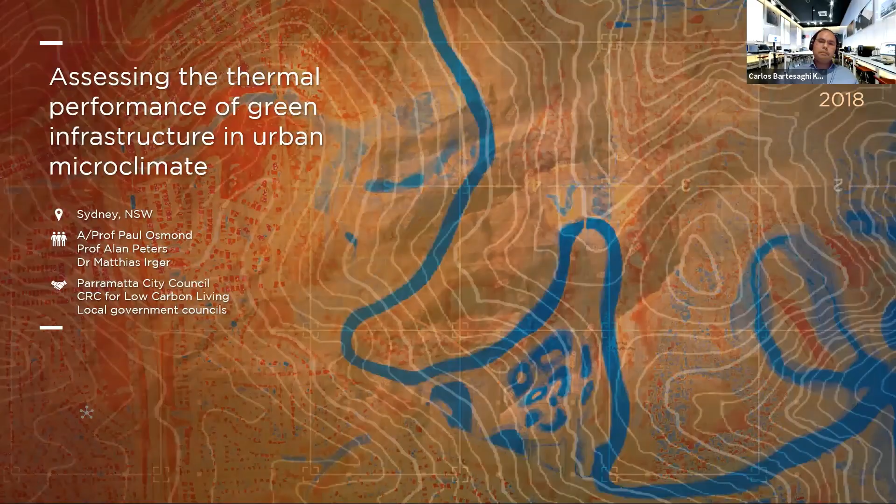So what is the problem of overheating in Sydney? Well, the spatial pattern of climate in Sydney is very obvious. We have eastern suburbs that are commonly much cooler than the western suburbs, and particularly Penrith, which is usually up to 10 degrees warmer during summer compared to the cooler eastern suburbs. So the patterns of urban overheating are not the traditional patterns we know, and particularly Parramatta, which is in between, has a completely different pattern. Parramatta is here, with completely different patterns, because it's exactly at the breaking point where the sea breezes stop and we have another synoptic condition coming from the desert, hot desert and westerly winds blowing. So we have these two forces fighting with each other.

So I was thinking I will concentrate on trying to understand the value of green infrastructure, in this case green open spaces, trees and water, in reducing urban overheating across Sydney.

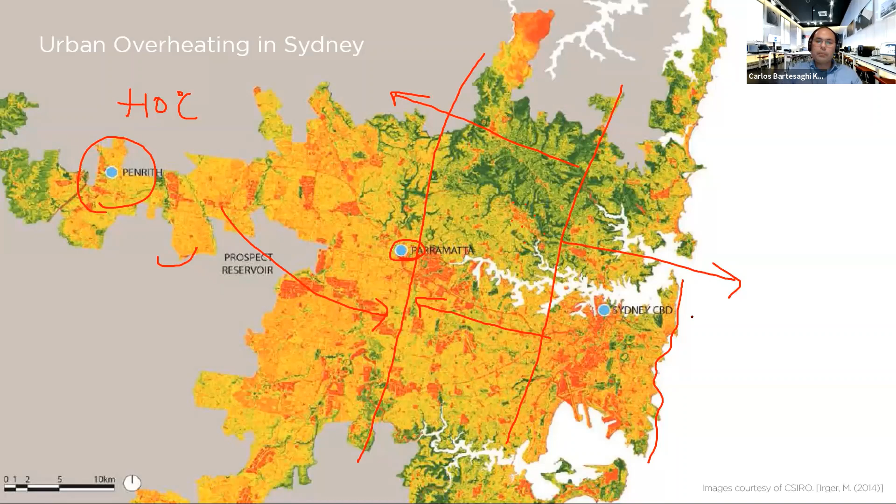So to do that, to cover such a vast land area, we need to use technologies and methods that can allow us to retrieve a huge amount of information, and in a very accurate and precise way. And the best way to do it is using remote sensing.

So in this case, I use remote sensing for spatial mapping. I use two technologies. The first one is LiDAR, which stands for light detection and ranging.

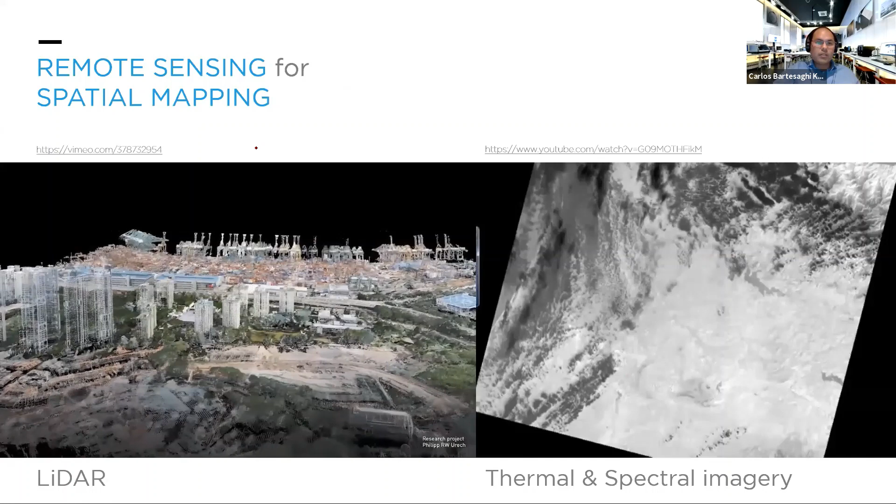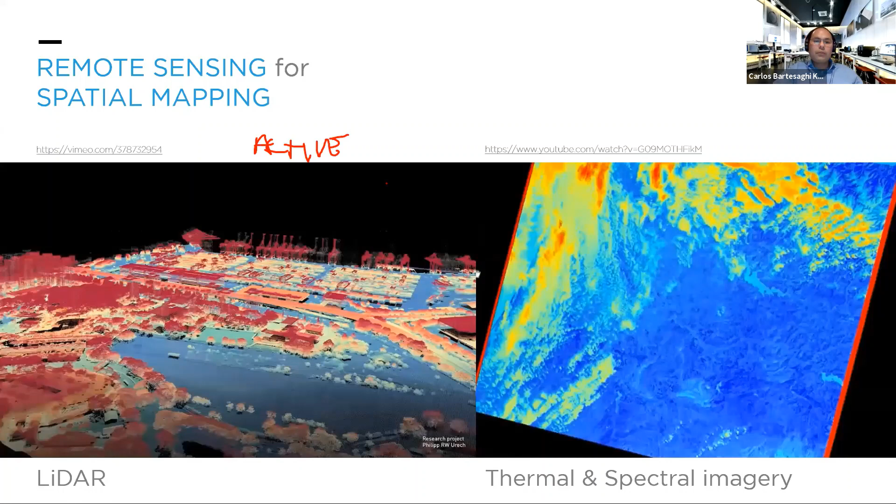It's basically an active sensor, mounted in a UAV, an unmanned aerial vehicle, or it can be mounted in an aircraft. Let's imagine the aircraft - I hope my drawing skills are good. So this sensor emits a pulse.

That's why it's an active sensor. This pulse flies over the air and hits the different surfaces, and then there is a return. The pulse returns back to the airplane and to the sensor, and the sensor can identify what type of surface it is based on the intensity of the return.

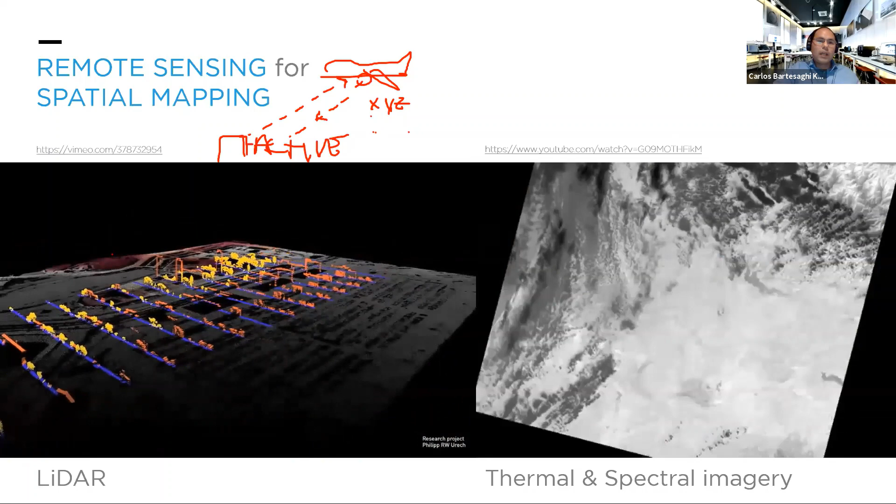It's doing this million times, and then creates for each of these points, which has an X, a Y, and a Z, meaning a geolocation, it retrieves a particular characteristic. So you get a point cloud - it's in fact a cloud made of multiple points.

With this we can retrieve all the physical and morphological characteristics of the surfaces, and you can identify, depending on the intensity of this return, what type of surface it is - a ground surface, an artificial or vertical surface, part of a building, or vegetation. You can use this to identify different physical features of the landscape.

And this includes vegetation, this includes different types of surfaces, and you can filter out all these points and create this sort of analysis that you see right now on your screens.

The other technology is a passive sensor, and this is spectral and thermal imagery. We have the spectrum of light, and it has different wavelengths, and these cameras detect the reflected wavelength from the surface. That's why it's a passive sensor, like the photographs we have, like the mobiles we have. It just detects the amount of light going into the sensor, and based on that information you can identify different characteristics.

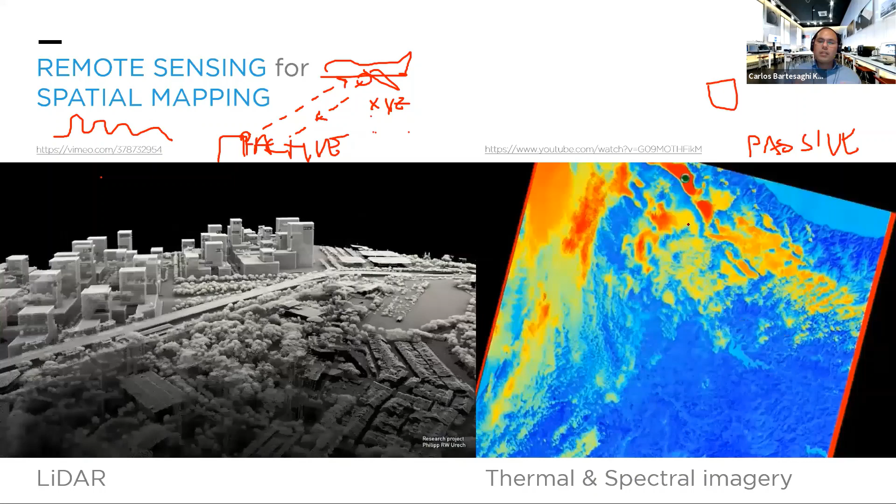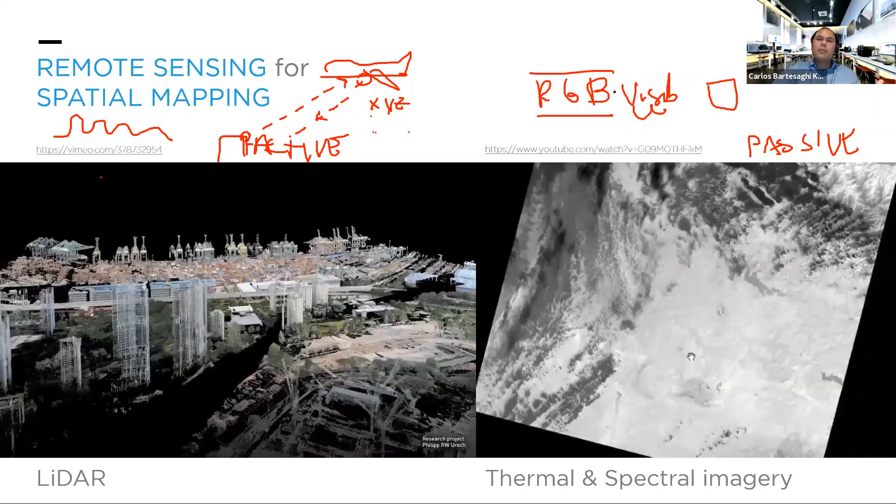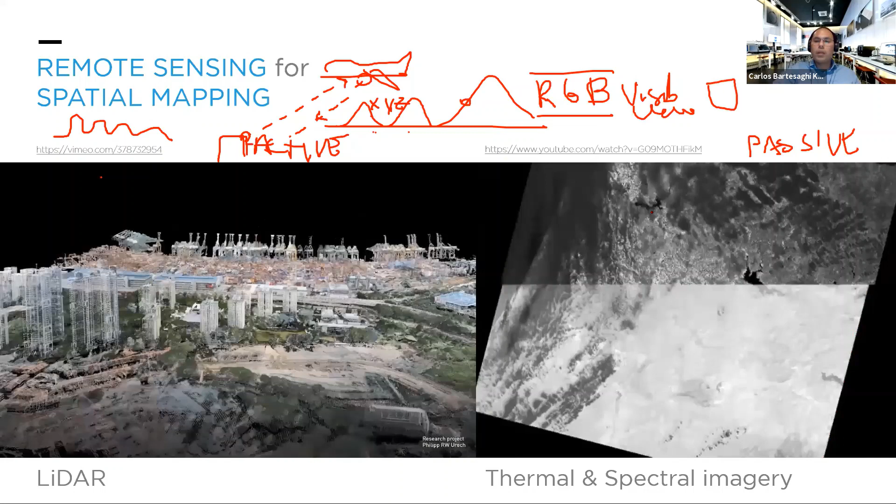The difference with thermal and spectral imagery is that we have RGB, the traditional visible wavelength of light, which is red, green, and blue. But with thermal and spectral, we have other wavelengths in which we can identify particular characteristics of the surface, like, for example, vegetation - where it is, if it is true vegetation or if it is fake vegetation.

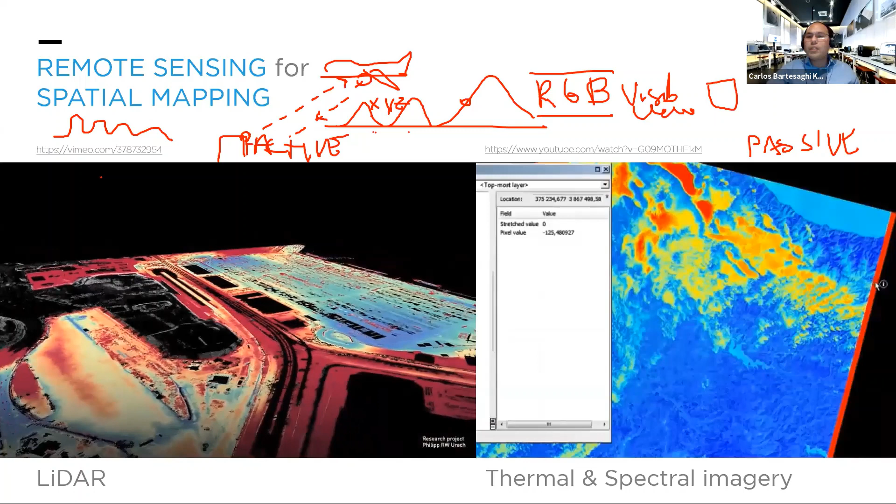This technology started in the Second World War, when they wanted to use a camera to identify if the greenery you're looking at is camouflage, or if it is a real tree. These were developed during the war. So it's just an anecdote or anecdotic idea here.

So what I developed here was a methodological framework that combines these two technologies to retrieve information over a very large land area. The methodological framework includes thermal infrared, LiDAR, and multispectral data. You can see here the extent of the data sets that we collected.

The LiDAR data sets are the square ones. These were collected from LPI, at that time the New South Wales Land Property Information Office - I think now the names have changed. This was a monitoring or data collection mission performed by the government, so I didn't have any control on the quality of the information that was retrieved.

We also have thermal imagery and spectral imagery. You can see the extent of the thermal imagery and the spectral imagery over different areas across Sydney.

Why this pattern? Because this is the pattern of the flight. So we have here the airplane, flying in this linear direction to try to get a cross-sectional idea of the different thermal conditions across the city - we have the CBD, the central areas, and the southwestern suburbs towards Bankstown.

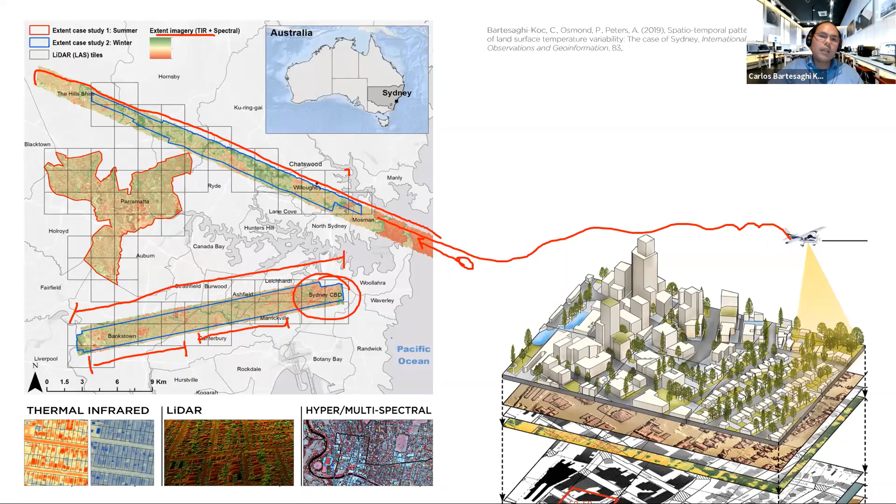And on the other hand, on the northern swath, we have Mosman, and near the coastline, and then the green area near Lane Cove, and towards the Hills Shire, towards the northwest as well. So southwest, northwest directions. And then of course we have Parramatta in summer, which gives us a lot of information about the heat island, particularly in summer. This data is very expensive to collect, so we were very limited by data availability.

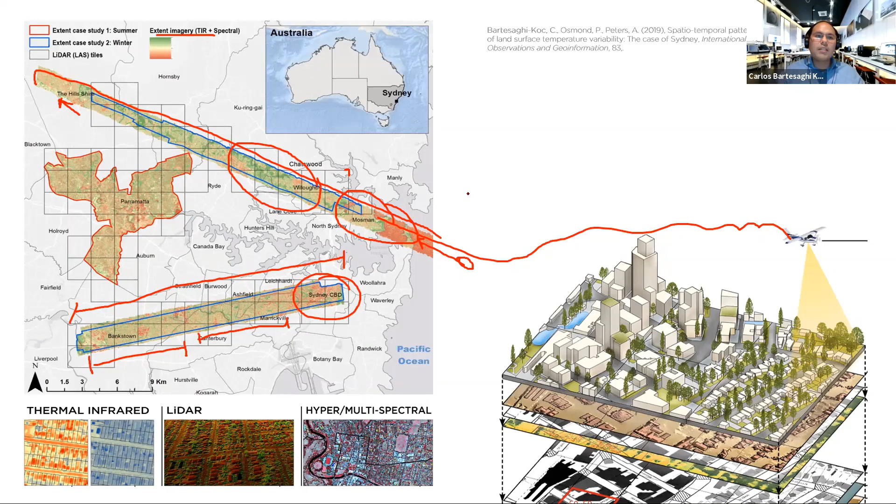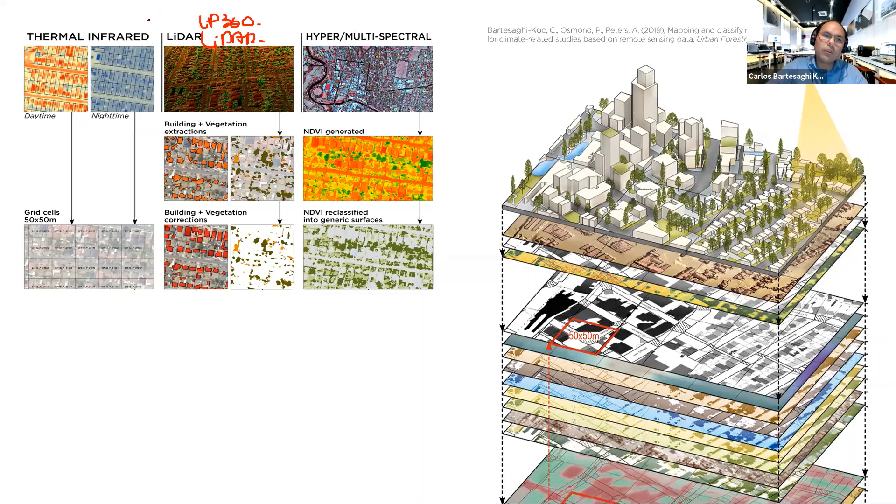The next step was using different algorithms, particularly GIS algorithms in ArcGIS, but also different software such as LP360. LP360 is a very well-known software for LiDAR analysis. The other is LiDAR Analyst and LiDAR Features. And currently I'm using Cloud Compare, which is another good software to filter this information.

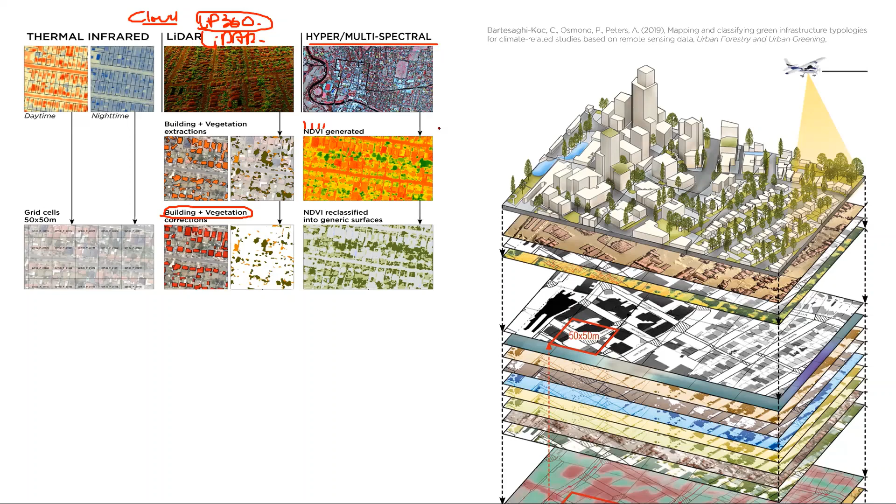I use particularly an algorithm in LP360 to retrieve the building footprints and also retrieve all the vegetation, the tree canopy and bushes. On the other hand, from the hyperspectral and multispectral imagery, I obtain the NDVI, the Normalized Difference Vegetation Index, which tells you what is the healthiness or real location of the vegetation.

So we're able to classify or reclassify this information into generic surfaces. The next step was to cross-validate these two pieces of information from LiDAR and from spectral imagery. So we have a physical retrieve and also a spectral retrieve that were filtered out, and then we got these beautiful buildings and tree canopies, and this level of detail for different areas across Sydney. So we have a very high resolution classification of different land covers.

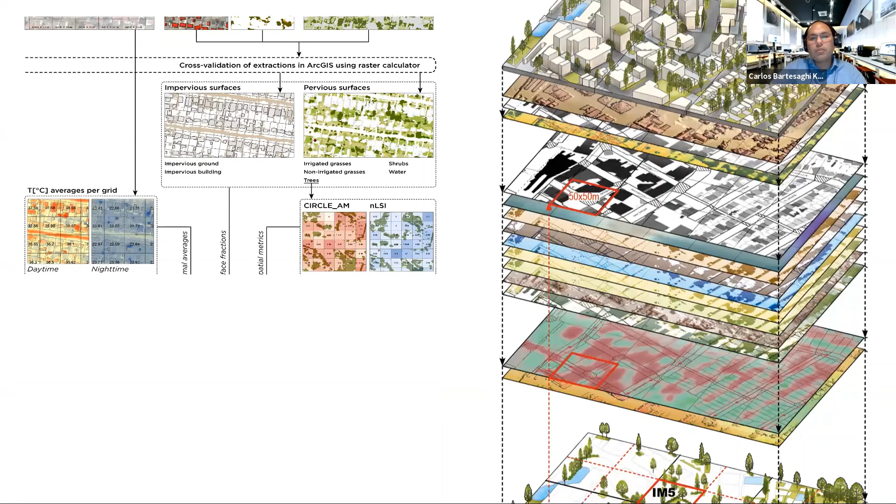Next step was to estimate the arrangements of the trees, and I used two indicators, spatial indicators developed for FragStats. I use this software, developed by the University of Massachusetts, to identify if these trees are clustered, in a linear shape, or if they are dispersed in the landscape.

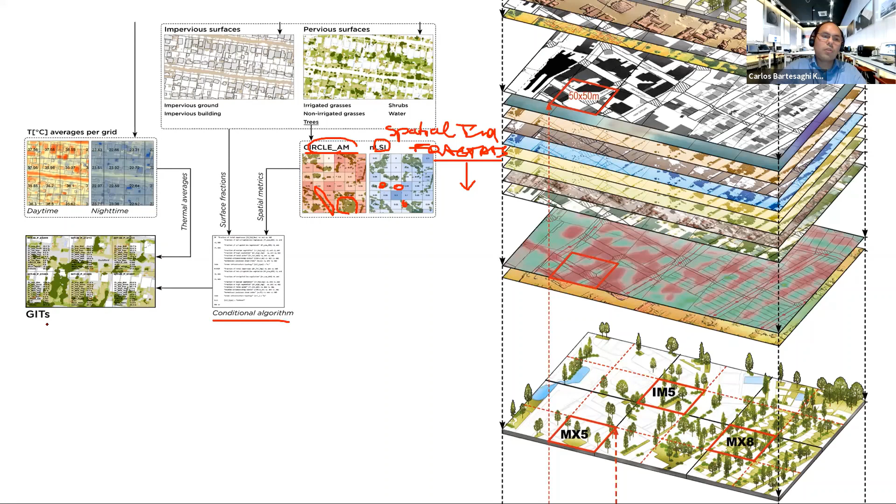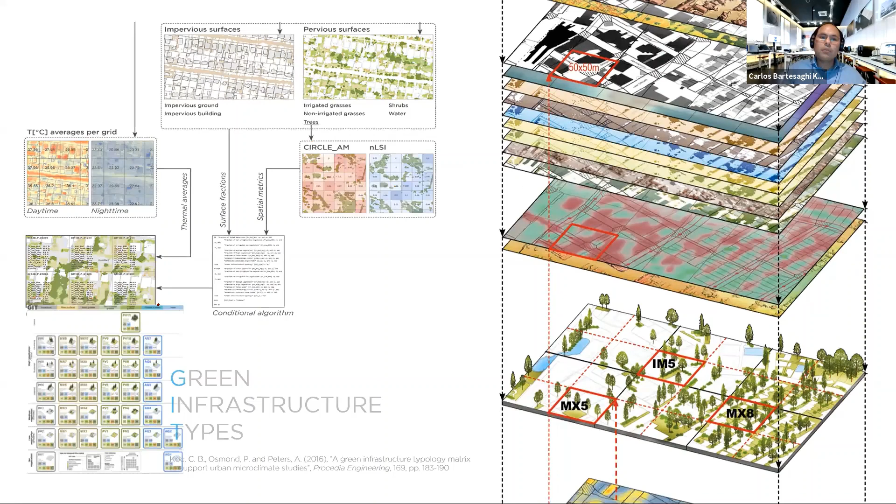And then using a conditional algorithm, I classify everything into green infrastructure types. So what are the green infrastructure types? The green infrastructure types is a new framework that I developed based on literature, to be able to classify the land into different typologies, combining different proportions of surfaces and different arrangements of trees.

So the main surfaces were impervious surfaces, non-irrigated grass, irrigated grass, shrubs, trees, and water. Each of these types has completely unique characteristics. So when you classify using the algorithm in GIS, each of these spatial units, in this case 50 by 50 meters, should be classified in only one type. It cannot be classified in two or three types. So it took me quite a while to try to have a classification that is quite accurate.

And I reached around 79 to 83% accuracy of classification, which is pretty good for the first time trying to do this. So each of these typologies or types has a whole typology with a unique combination of elements that help me later to compare the performance of one particular typology against another.

So you have here, for example, IM5, which represents impervious, mostly impervious with scattered trees, and I want to compare if this is much cooler than MX8, which is mixed grasses with scattered trees. So here you try to identify how the difference in the proportion of impervious surfaces can give you a completely different thermal profile for that particular type.

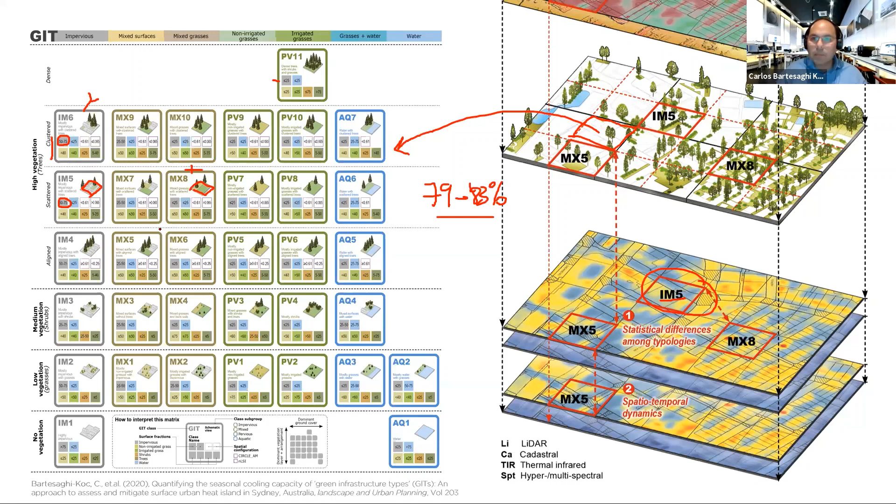So this is in terms of methodology. Here are some of the results. Particularly in this talk, I want to concentrate on the methods more than on the results, but I also want to show some of the results to understand what are the outcomes of that methodological framework. So here we have the classification, all the classes.

All the classes are here represented with a color choropleth. So you can see the greener areas in the central area of Lane Cove, and in Chatswood you can see that they are mostly impervious. Southern swath, you show Sydney CBD quite dominated by impervious surfaces, and so on, and Parramatta. So it has a good visual agreement with the existing land cover.

I also performed a statistical analysis, and also I remember in MATLAB a classification learner, which has different algorithms using machine learning to train the computer to understand if these classifications are correct. So I got between 84 to 91% accuracy in my classifications, which was really good.

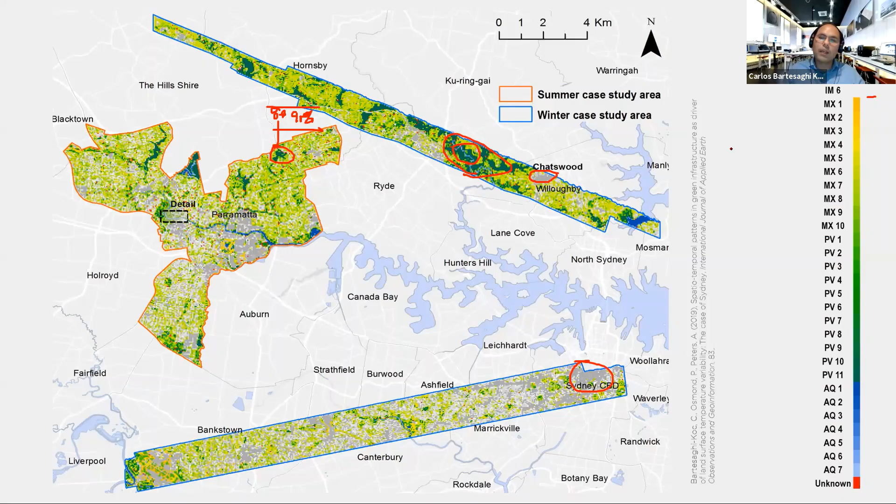I'm not going to talk about the algorithms because they're a bit complex at this stage, but it's important to show the results over the landscape. So we have here one of those features in the matrix. This little frame we're highlighting didn't want to be classified, so it was simply a rebel and was excluded from our analysis. The rest of them participated in this statistical analysis, in which we invited all of them to be part of it.

It was quite a good classification. There were, of course, errors, so we estimated our level of error. After this classification, we were able to identify our hotspots and cold spots.

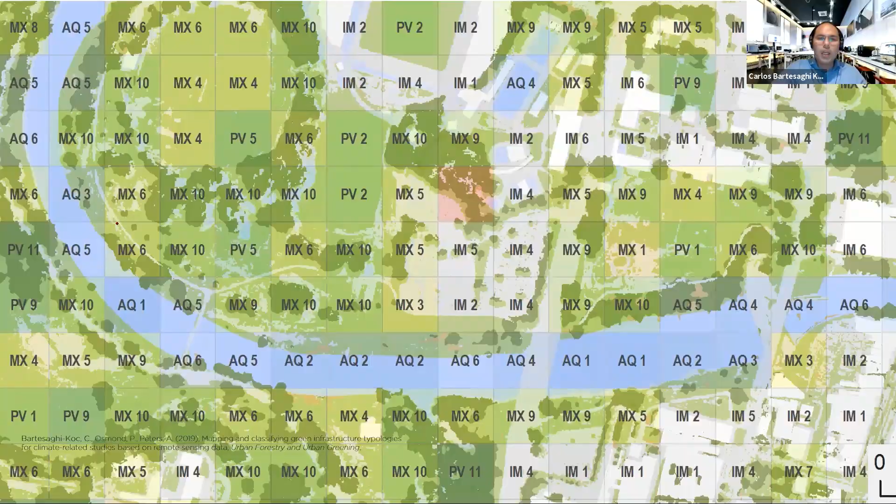Typically, the classification of hotspots and cold spots is done using different methods. You can use interquartile ranges, or equidistance ranges. The most common is the Jenks classification optimization, or natural breaks, which tries to find homogeneous groups of values and represent them. This is how traditionally our thermal mappings are represented. You can see this in a lot of websites and councils - I'm not saying it's wrong, just that they use GIS algorithms already embedded in the software to classify within ranges. These ranges, usually the natural breaks or Jenks optimization, just try to homogenize groups that are statistically quite similar.

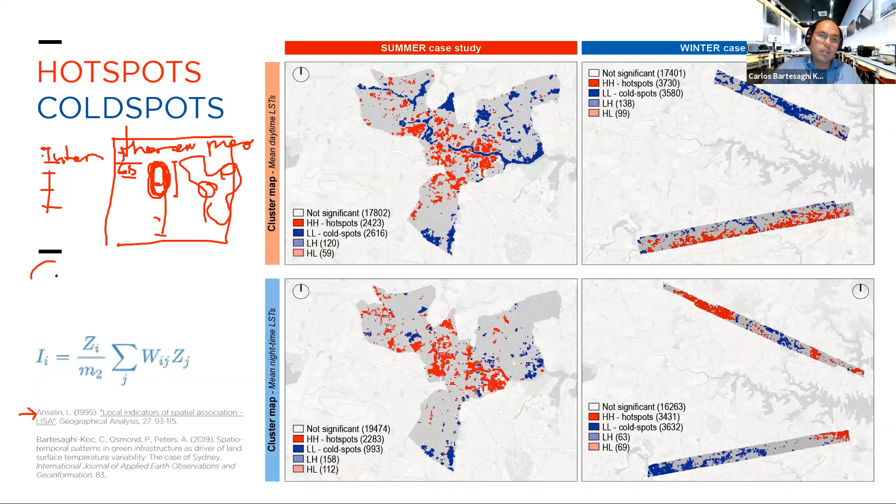So you will see representations in which the thermal map shows hot areas and cool areas. But what I tried to do in this case was something a bit more complex - using local indicators for spatial association, called LISA. It was developed by Luc Anselin at University of Chicago. So I used GeoDa, which is open source software, to estimate these hotspots and cold spots, not based on traditional statistical methods, but using a spatial method.

That means we consider, imagine this is a grid, the 8 neighbors around your point. So we consider similarity by value and also similarity by distance. As we know in the rules of geography, everything is related to everything in space - the closer you are, the more influential you are. So what we're trying to identify with this formula is basically the spatial autocorrelation. It means that the values next to this particular grid, in this case infrastructure, are also in close proximity. Using this robust statistical method, we were able to identify the hotspots and cold spots.

Interestingly, the hotspots, which we assume are always linked to impervious surfaces, are not always there. What happened? You have, for example, the CBD of Parramatta, which during the morning is really hot, but during the evening is relatively cool - you don't have a hotspot there. That happened because of the presence of shading, for example.

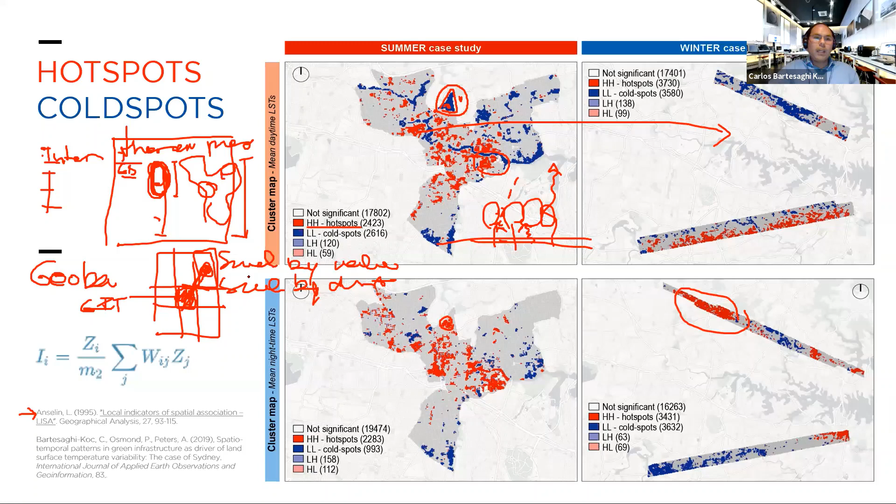We also calculated the cooling capacity using normal statistical methods like ANOVA, analysis of variance, and estimated the departure from the base case. Our base case is a typology that is completely impervious, IM1, representing a complete lack of greenery and water. We then compare the distance or departure from this average value.

We identified during the day the cooling effect of different typologies and found that water is really cool, but at night it's not as cool because of the heat capacity and thermal capacity of water, which absorbs heat slowly but also releases heat slowly. We found that dense trees are very cool during the morning, up to 8 degrees in surface temperature. All this analysis is surface temperature, and it's much cooler at night.

We also identified that a lot of anomalies in this analysis were caused by differences in albedo and reflectance of the surface, basically the properties of the surfaces. Albedo represents the amount of short wave radiation that may be reflected. Low albedo materials end up absorbing a lot of heat, and high albedo materials tend to reflect most of the radiation, so they absorb less heat.

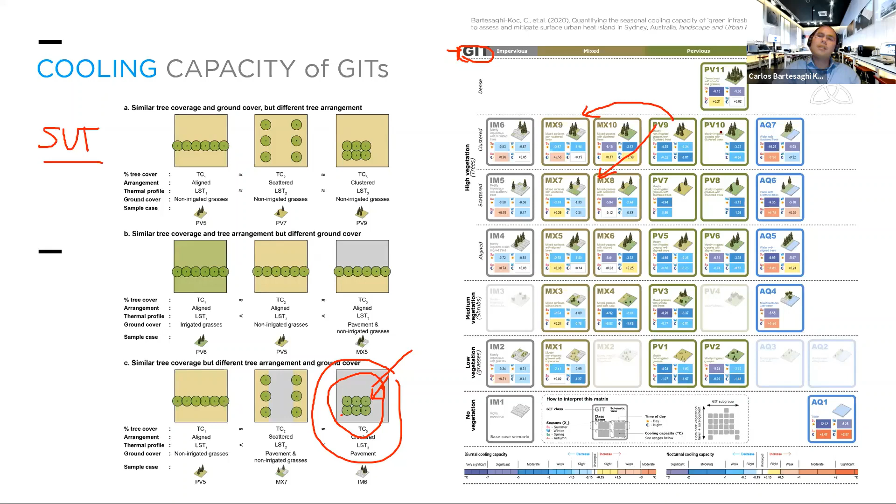Now I'm going to present the second project, the Smart Climate Road, a climate responsive design for Phillip Street. This project was led by Professor Mat Santamouris and his team. He is a renowned climatologist and academic, one of the top in the field, and I feel really happy to be invited by Professor Santamouris to participate in this type of research.

I name here all the team who participated, and I acknowledge all of them, because this is work that is not possible to be done by only one person.

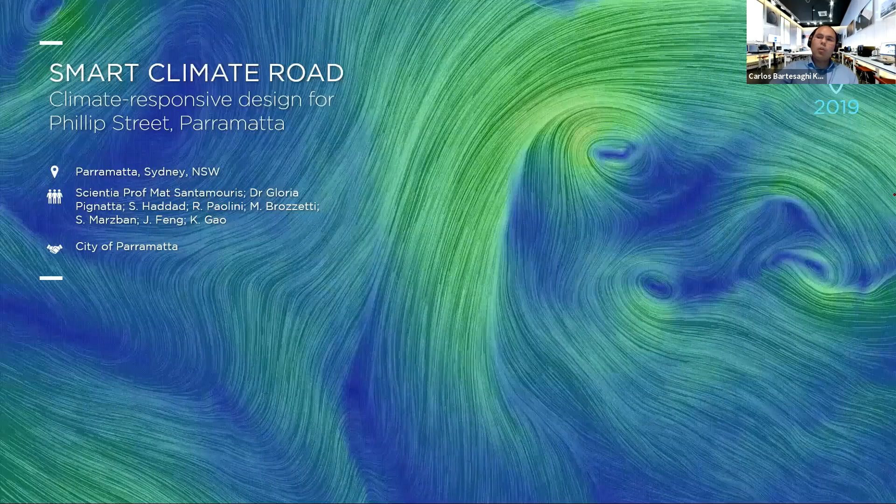Our key client was the city of Parramatta. Parramatta is located 22 kilometers from the coastline, or 19 kilometers from the Sydney CBD. It's the second CBD, or central business district, of the Sydney metropolitan area, so it's quite important in terms of economy and jobs, and also in terms of urban form.

It has had very dramatic urban developments happening recently. But also, because it's far from the coastline, it doesn't have the significant effect of the cool sea breezes that fight against the hot westerly winds coming from the desert. So we have two synoptic conditions really fighting with each other, and they found that the battlefield is exactly the city of Parramatta.

So city of Parramatta, as you can see here, this is the central area. We focus on Phillip Street, located here, from the beginning to the end of the street, because there was a plan from the local government for a serious redevelopment of the whole street. They were thinking, why not create a smart climate road, and develop it using science-based design.

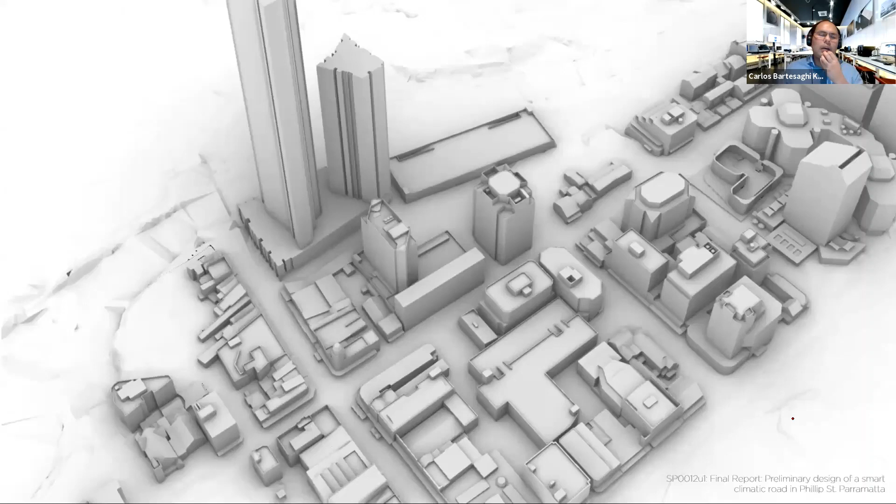So we were invited. This is the three-dimensional model of the site before the project. Before starting, they recommended we review the different impacts of these new skyscrapers and the new developments around the CBD.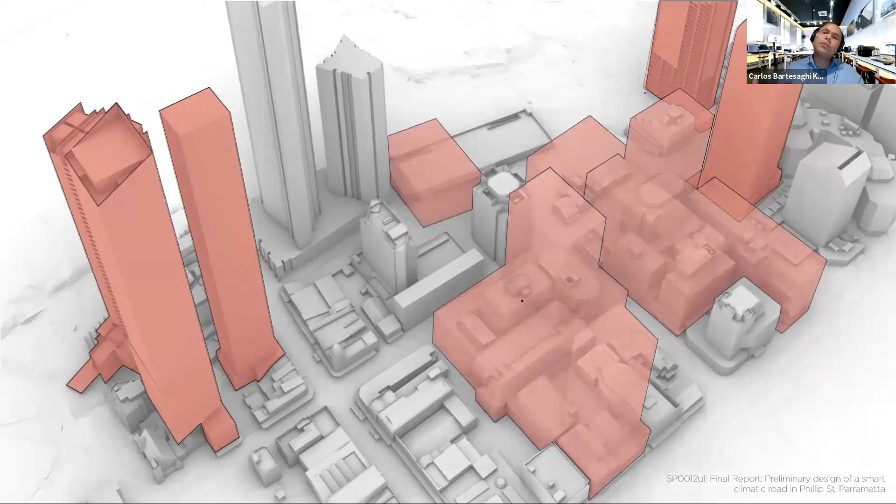They also wanted us to model the different temperatures and climate conditions in a highly dense scenario, which is not as bad as people think—it has pros and cons, advantages and disadvantages. So these are generally the conditions of the site.

So the methods we decided to use are really important. In this project it was quite important to have a very robust methodological framework, so we could provide real, evidence-based solutions for the site.

The first technology is thermal photogrammetry—I'll explore each of these in more detail in a few minutes. The second was on-ground monitoring. So we have aerial monitoring and ground monitoring, giving us a complete set of analysis for the whole area.

With all this information, we move into the algorithm-aided design phase, designing solutions that consider all the climatological aspects we monitored during the previous phases.

And with that information, we move into computational fluid dynamic simulation, or environmental simulations, using ENVI-met. ENVI-met is a well-known and well-established CFD software that can help simulate or model different climate and environmental conditions and parameters, including surface temperature, air temperature, and mean radiant temperature—which is basically the 'feels like' temperature, to put it simply.

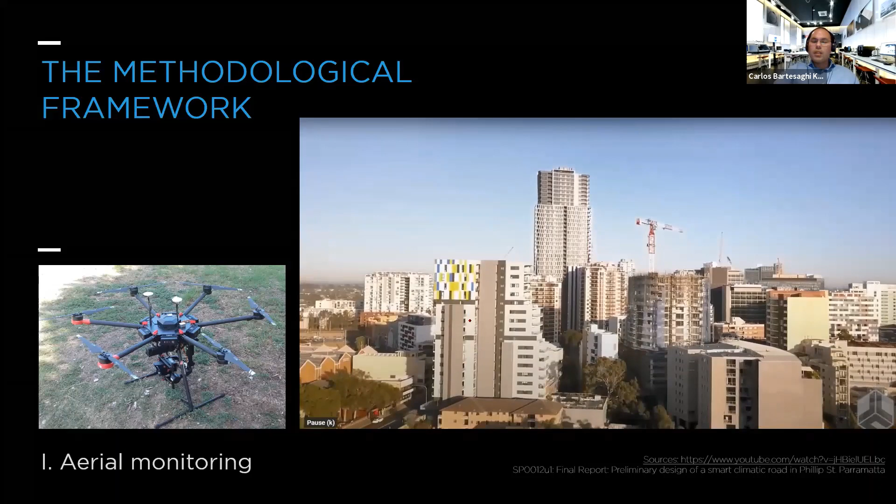It's not only about looking at the temperature of the asphalt—if the road is congested, besides the traffic contributing to anthropogenic heat, you'll have car surfaces that are really hot, contributing to a higher temperature of the street canyon. This technology helps us retrieve all this information.

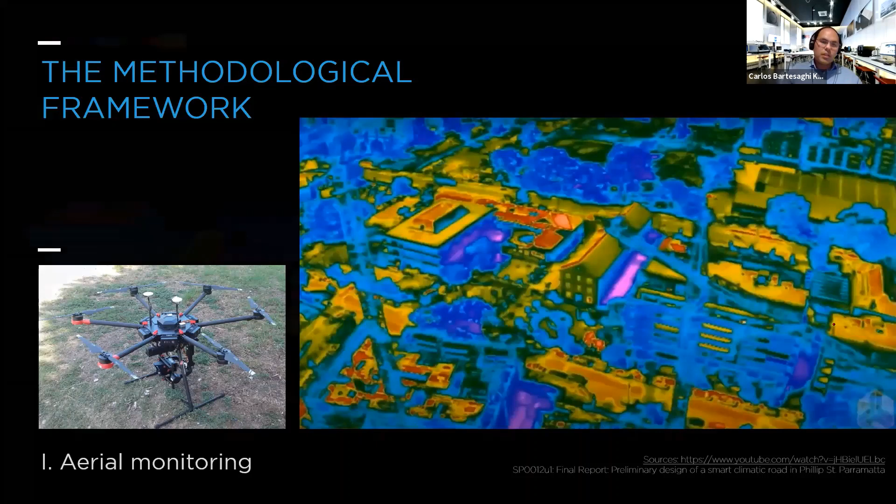But the most interesting one is the photogrammetry approach behind it. Photogrammetry is basically the science of taking photographs from different angles, then processing them in photogrammetric software—there are many available nowadays, like Matterport, or other software like Autodesk Recap.

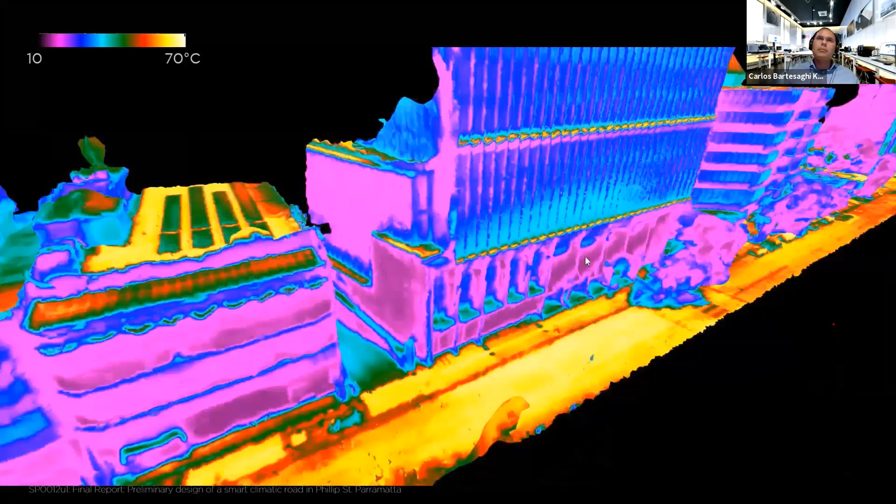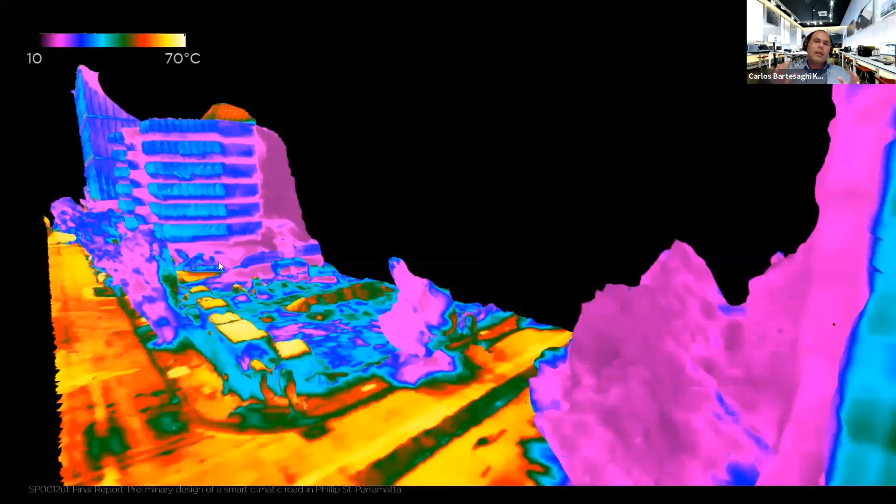You have Map4Drone, and many others. Pix4D is another well-known software—when you collect photographs from different angles, the software triangulates this information and creates a 3D mesh. So what you see here is a 3D mesh.

Instead of visible light, you have the thermal information captured, so you can see where the hotter roofs are, and the cooler pavements, or cold pavements. You can see the asphalt is considerably hotter, up to 60 or 65 degrees.

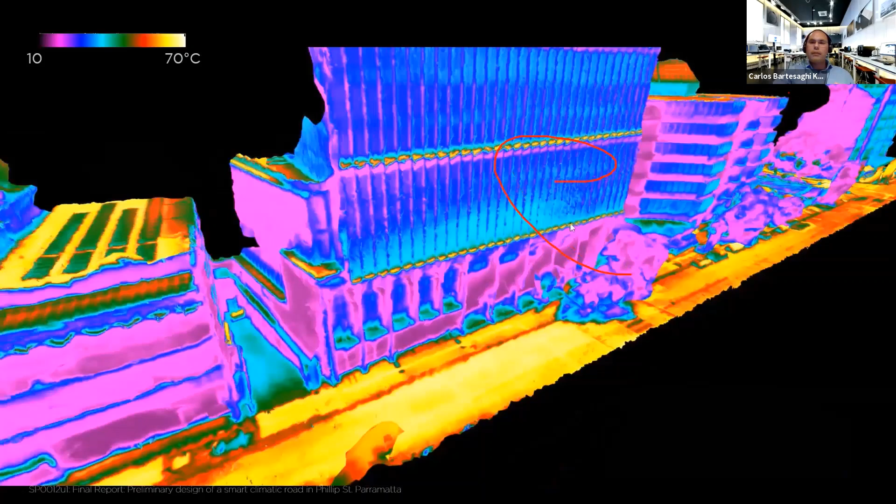Some roofs are much hotter than others because they have different reflective characteristics, and others are much cooler. Also the tree canopy matters. Pay attention to the reflectivity of the facades too, because all of this is glazing. Even though the facade is cool, most of the heat is reflected into the canyon because of the reflectivity of the glass, and because of that, a lot of that heat is trapped in the canyon.

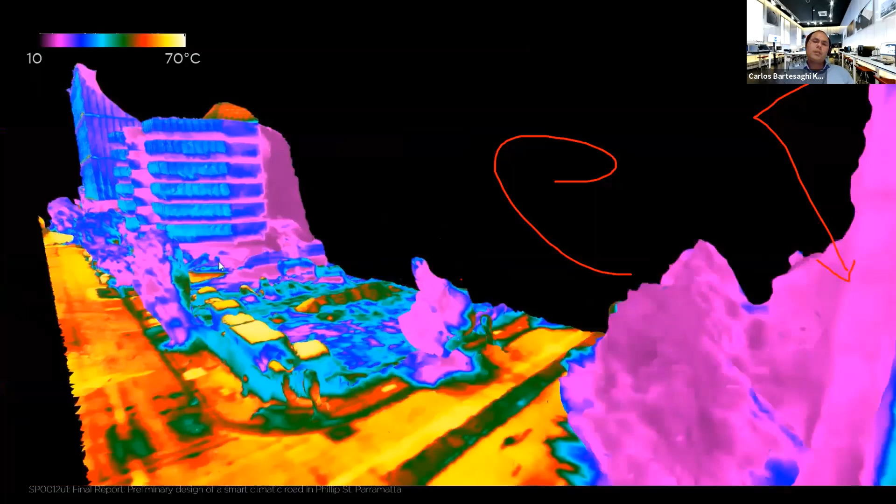With this information, we have a three-dimensional idea, and a three-dimensional mesh and model can help us understand where the different overheating patterns are along the street.

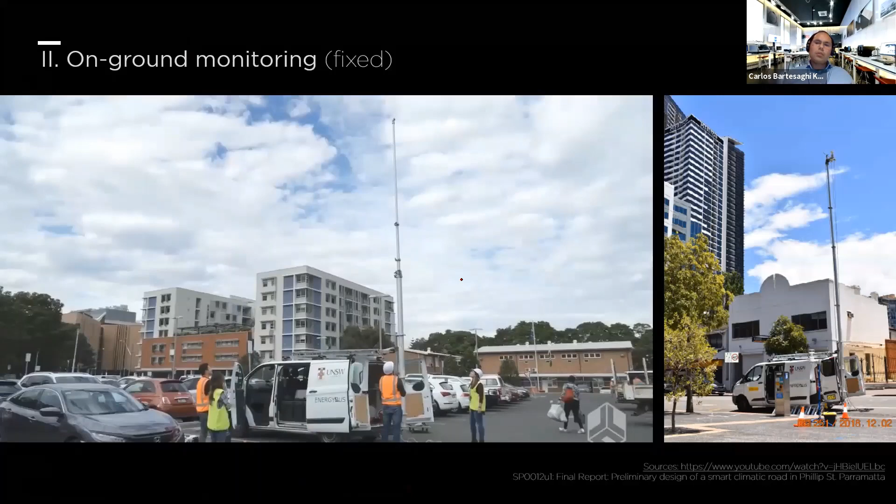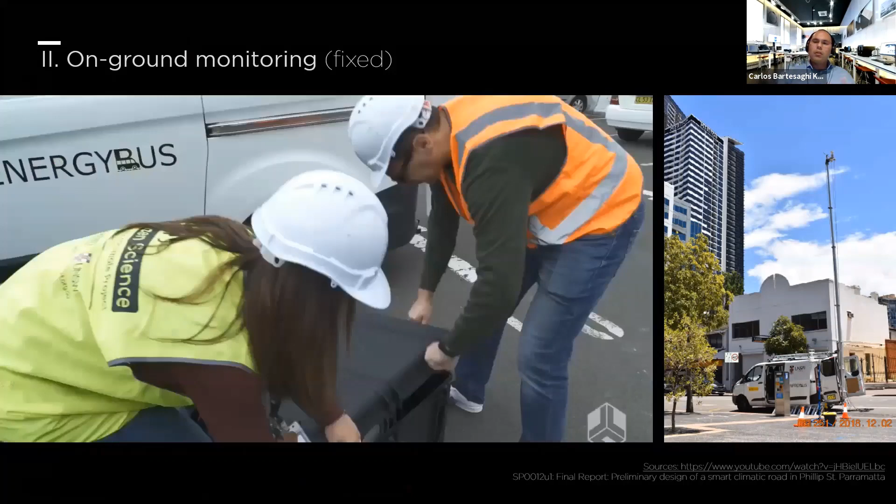The second step is monitoring that happens simultaneously. At the same time we deployed the drone, during a hot summer, typical summer day. We also deployed on-ground monitoring, using both fixed and mobile methods. This is an energy bus, parked in the central area of the street, with a mast that can vary in height, measuring air temperature, relative humidity, and wind speed.

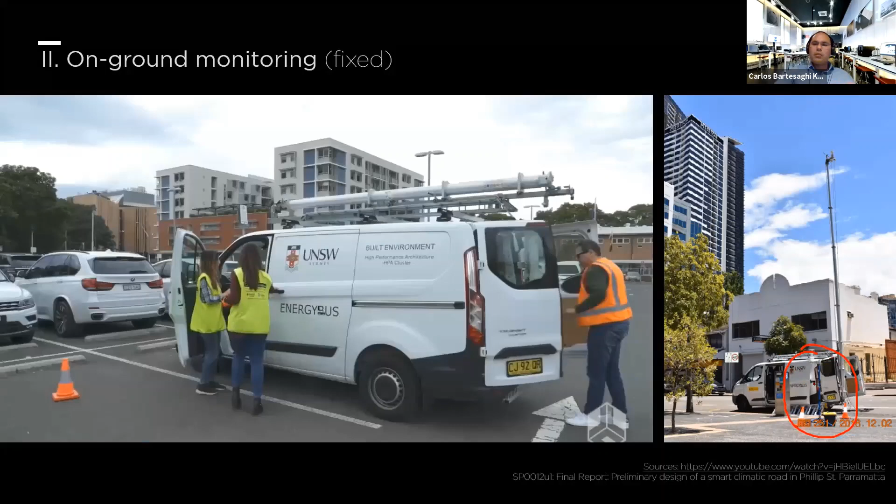At the same time, we have another station you can't see here, a fixed station, a MEC Pro station that also measures relative humidity and air temperature. The flexibility the energy bus gives is that you can place it anywhere in the street, but we decided to just use it as a fixed method, fixed to a point that we can use as a reference.

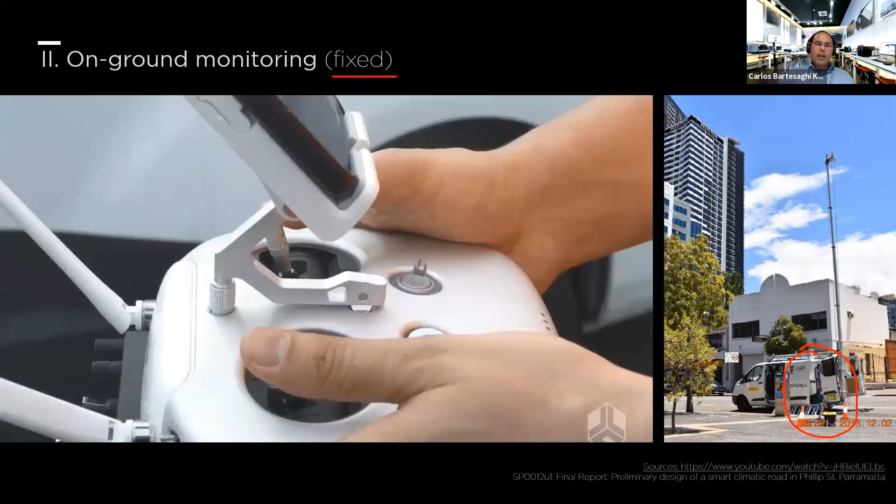So we have the on-ground monitoring. This was a monitoring campaign with several people involved. I was not the person who organized the campaign, but I was part of the team. We all collaborated in different ways. I was going around with this trolley.

I remember that day was really hot, unpleasant, and very windy - a hot wind. We had a small meteorological station measuring wind speed and air temperature, with the sensor covered for solar protection because we don't want direct solar radiation to hit it. We also used thermal cameras to retrieve the different temperatures of surfaces and pavements.

As you can see, the asphalt was nearly 57 degrees. It was also quite dramatic to see that a lot of the pavement along the street was considerably hot, nearly 50 degrees.

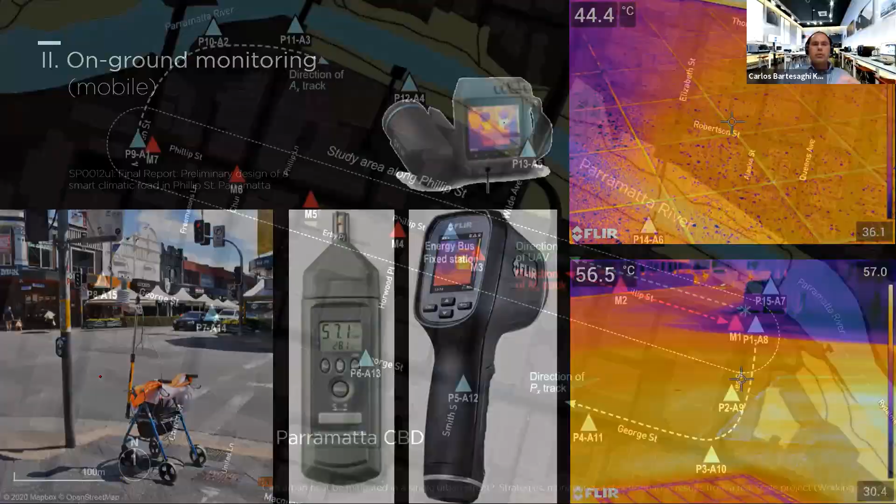So we deployed all these sensors. This was a well-developed monitoring campaign. We had the energy bus and the fixed station in the middle, and different trolleys moving around with sensors, monitoring all the temperatures around and along the street.

We also mounted a UAV on top of the car taking photographs, and on a second day we had the UAV flying over this portion of the street to retrieve a three-dimensional photogrammetric mesh.

With all that information, we're able to understand the significant patterns. We used the central reference point, the energy bus, and calculated the difference with the different stations and measure points.

We found that particularly between Marsden Street and Church Street we have very high temperatures, and much cooler temperatures as you get closer to the Parramatta River. This happens because sometimes breezes from the ocean travel along the harbor and penetrate farther inland, up through the Parramatta River to this area. You can see exactly this gradient between the warmest CBD, with hot westerly winds, and the cool easterly winds penetrating farther from the harbor.

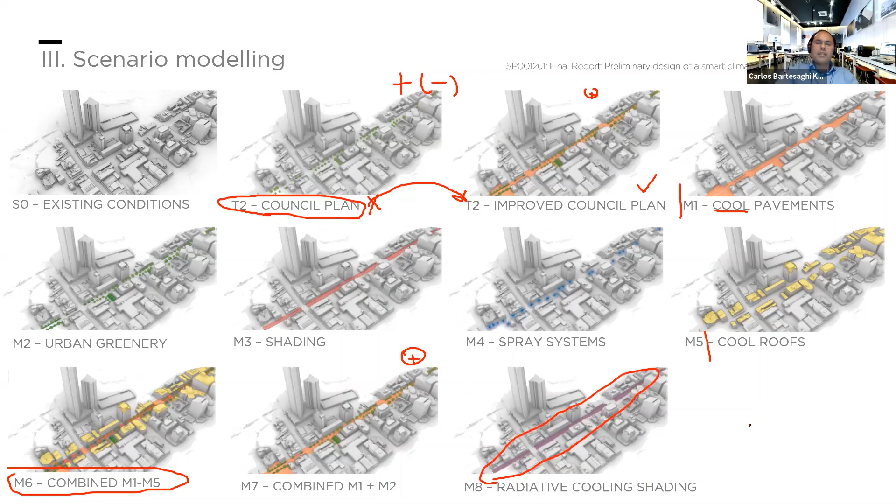In fact, we added a couple of extra trees. This was our preferred option, and also the council's preferred option. We also simulated a new technology called radiative or daytime radiative cooling, which I'll explain later.

We modeled these options in ENVI-met, but before that, we conducted another analysis to understand different local conditions using computational design tools. In this case, I used Rhino and Grasshopper.

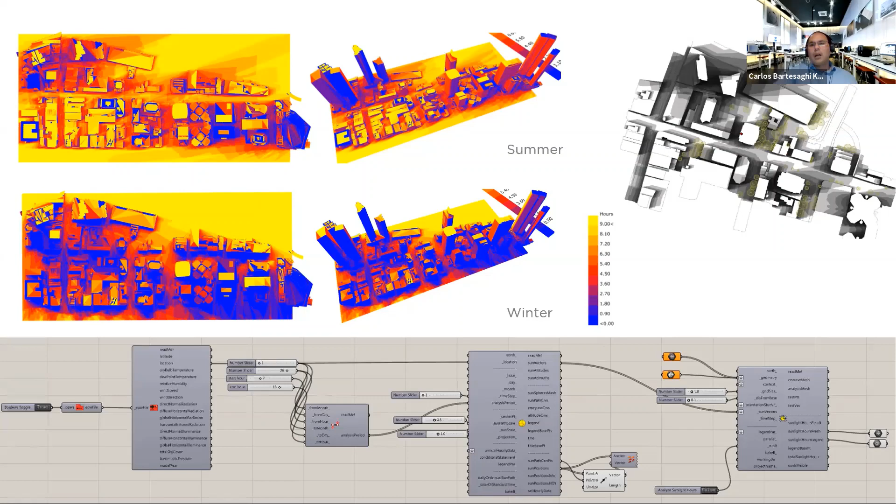We calculated the number of sunlight hours that the surfaces receive, giving a better idea of the overshadowed and overexposed areas during different climatic conditions. For that we used Grasshopper, an algorithm-based software that's part of Rhino 3D. It's parametric, so you can change the parameters and automatically get a result displayed in Rhino.

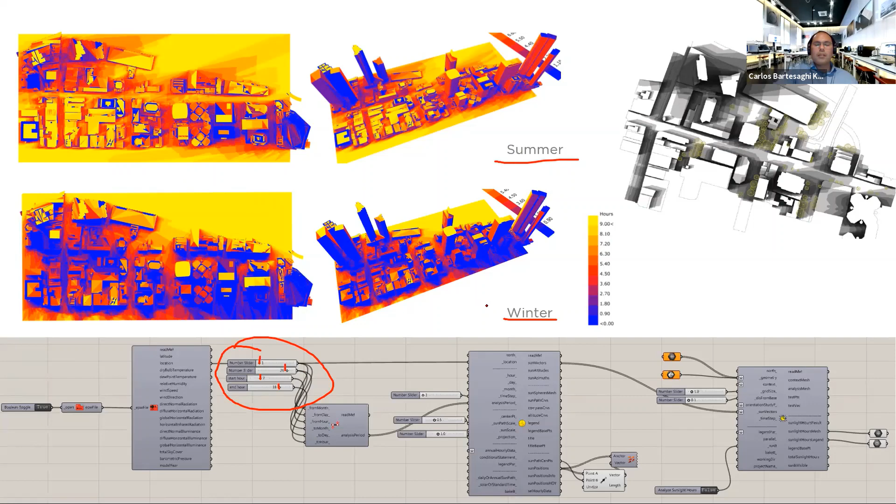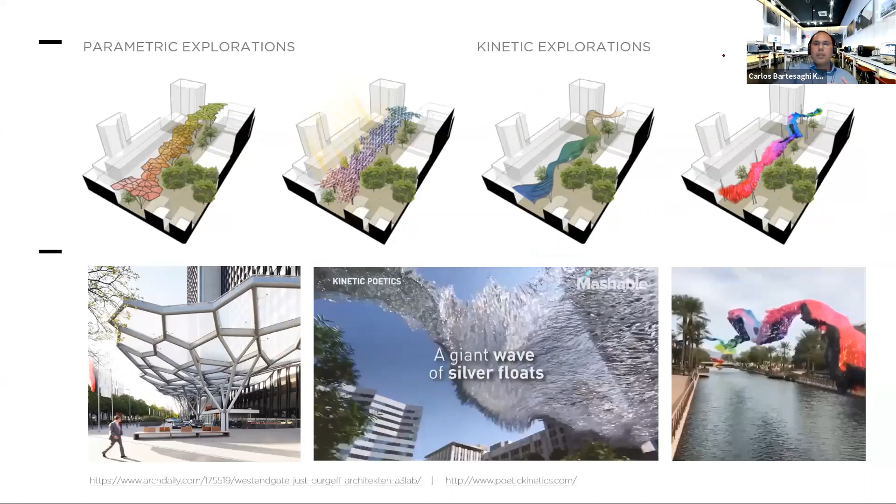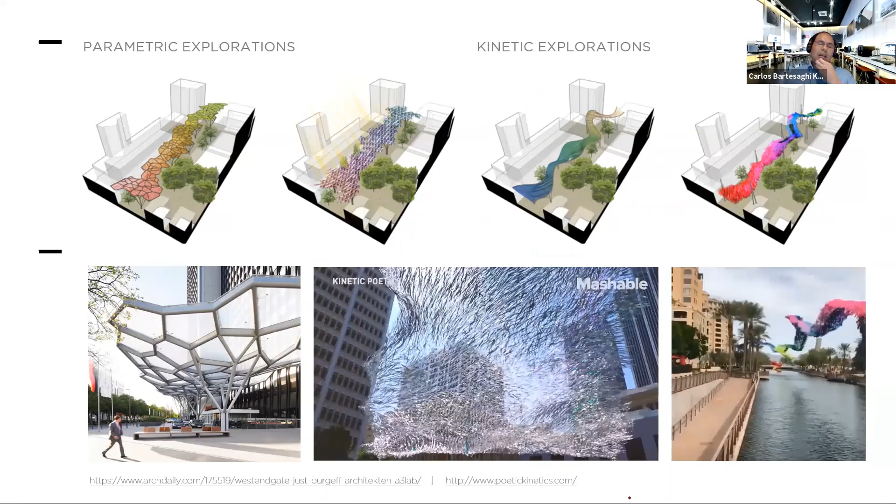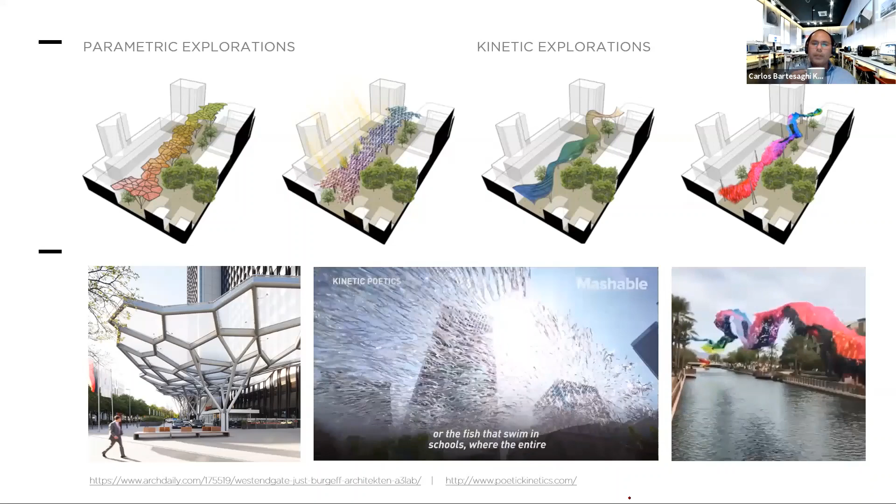We also explored different parametric options, including an exploration process with kinetic options. These kinetic options are like the ones you can see here - poetic kinetics. I came across these videos online, and we were thinking why not also have a very creative and playful shading device that can vary and play with the wind, since the wind is quite strong in the area.

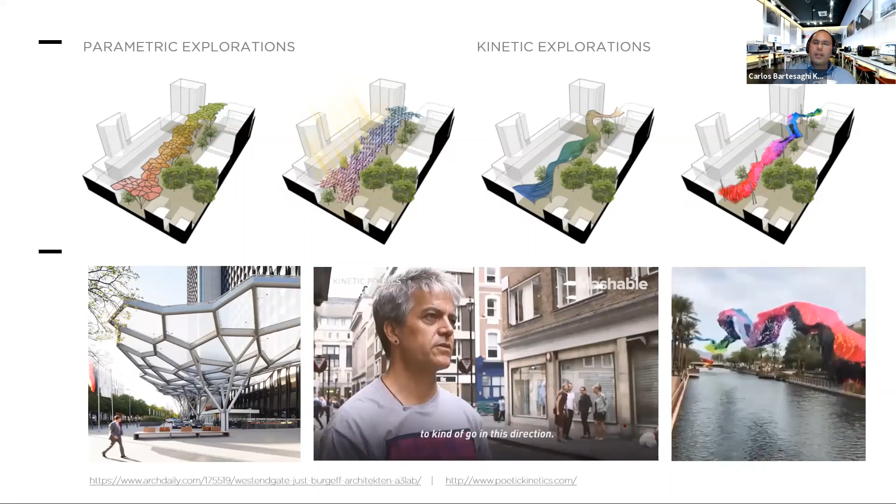We have a significant amount of wind blowing along the river and also coming from the west. Patrick Shearn is the co-founder of this company, and this is basically their installation. So we were thinking about how long and how durable these installations would be.

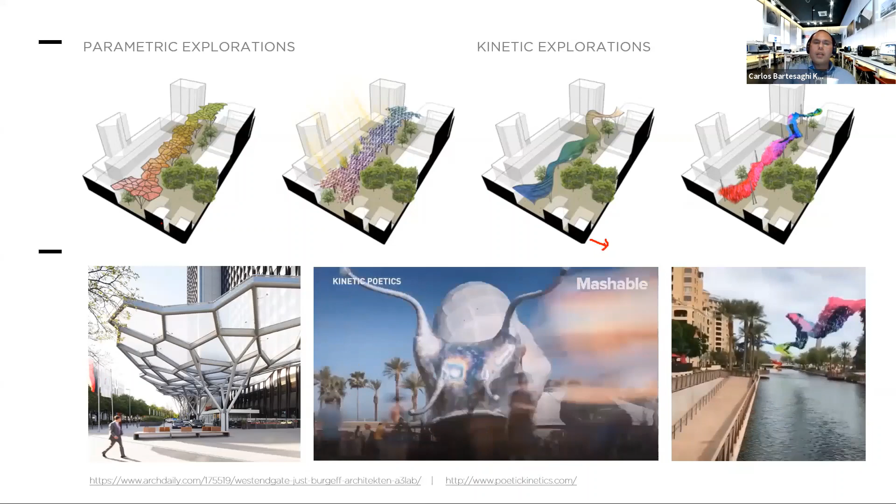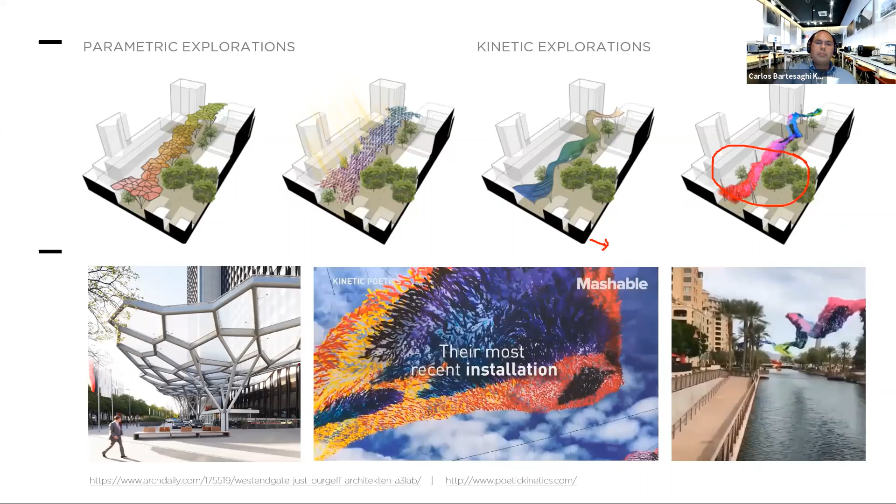Usually these installations last just a couple of weeks or months. So a long-term solution may not be the best approach - it may be useful for an intersection or a small plaza. But we also explored different parametric solutions using Rhino and Grasshopper algorithms. This is what I tried to model.

It's just a surface that can adjust to different heights depending on the amount of shading wanted, and it also considers the location of the trees and newly planted trees, so it avoids going over the canopy - all using this definition in Grasshopper.

We also considered using water-sensitive urban design, so the structures were supposed to collect water, which is distributed to the ground, stored, and used for irrigation. This allows for a lot of greenery and green walls, plus different sensors installed in different parts of the shell of these structures.

We can collect data there and use an Internet of Things approach, combining this data to provide different services - for example Wi-Fi or 3G services, but also environmental monitoring, security, infrastructure and transport. The idea is they can identify if the temperature is really high in the street and relative humidity is low, and the spray water systems installed there can start spraying water over people to improve thermal comfort.

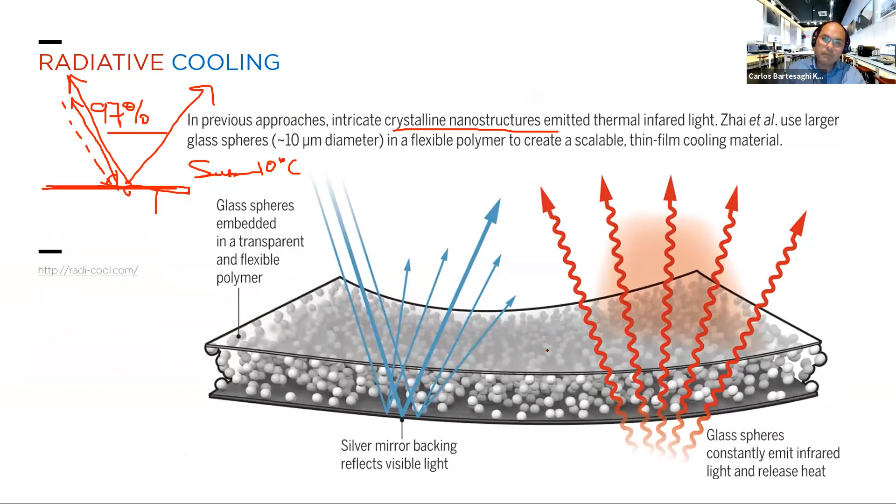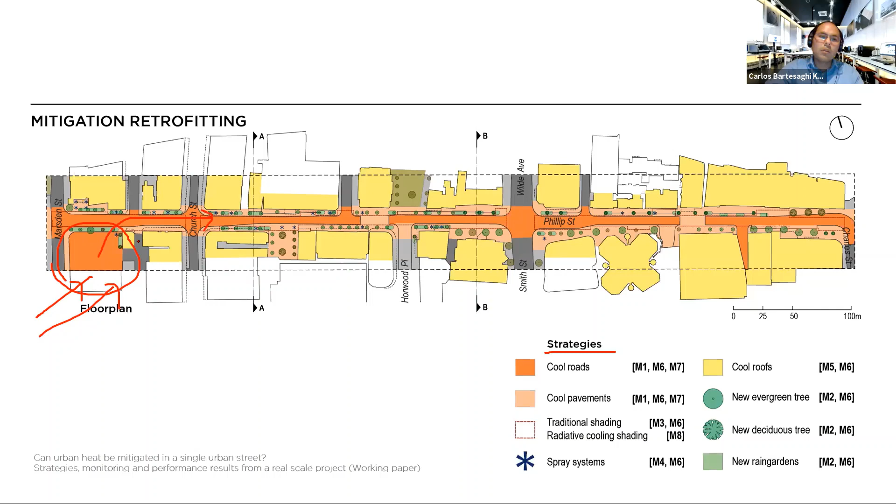We consider areas that require more green canopy, where more shading was also recommended. Here near Marsden Street, there was a car park close to the police station that was all covered by asphalt, no trees, and considerably hot. So when the wind blows, all this heat is distributed into the canyon, and it was a tremendous impact. So we decided to pave everything with a cool material.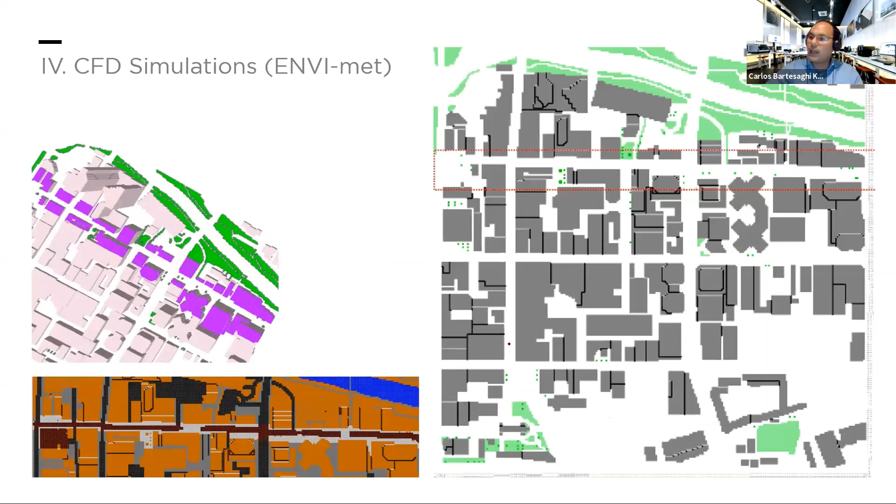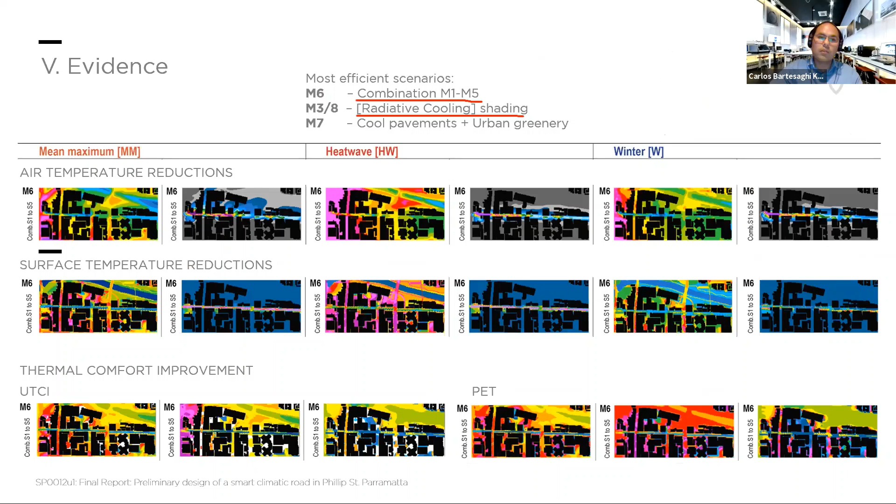We performed the CFD simulations in ENVI-met. What you can see here is the ENVI-met domain. From this information, we identify the different temperature reductions in the canyon. As you can see, in some cases, the most effective, specifically the combination of radiative cooling and shading, you can see a spillover effect over the surrounding areas because of the wind. So these technologies really help a lot to reduce the temperatures.

They want to repave everything in Rundle Mall because they think, according to them, they have an argument that it's not climate sensitive, or because it doesn't consider the pavement the cost of the climate change. So they want to repave everything.

So we were thinking it would be very interesting and very useful if either a consultant firm or academia could perform a quite comprehensive study along the Rundle Mall, so we can really provide science-based solutions, and not only based on anecdotic arguments. But it will be interesting to see if they are interested to do this.

I think we'll get a lot of benefit, and the other colleagues in the school already have information and data that we can use to do a very similar project to the one that we did in Parramatta.

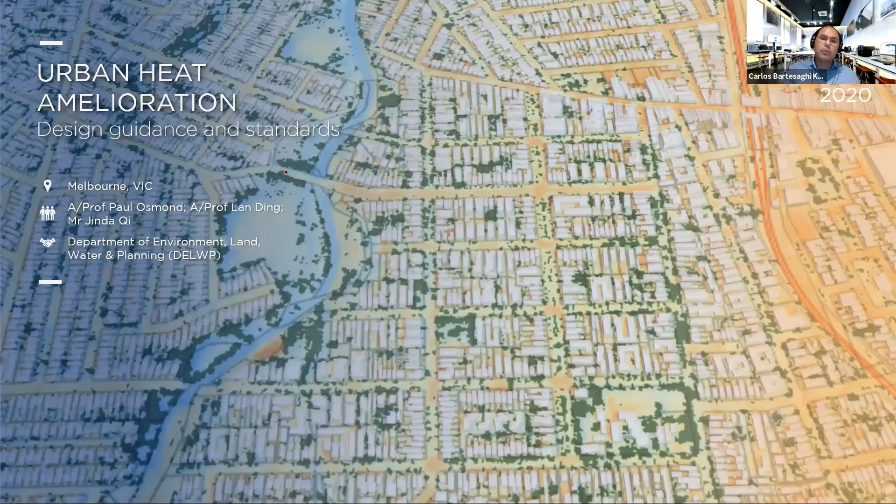We already know this is the new norm, or the new business as usual, in new developments, not only in Melbourne, but all over Australia. We have a projected median hot days by 2050 that will be nearly double. So we have 6 days now, like in 1986, and we'll have 13 days of the year that will be heatwave days.

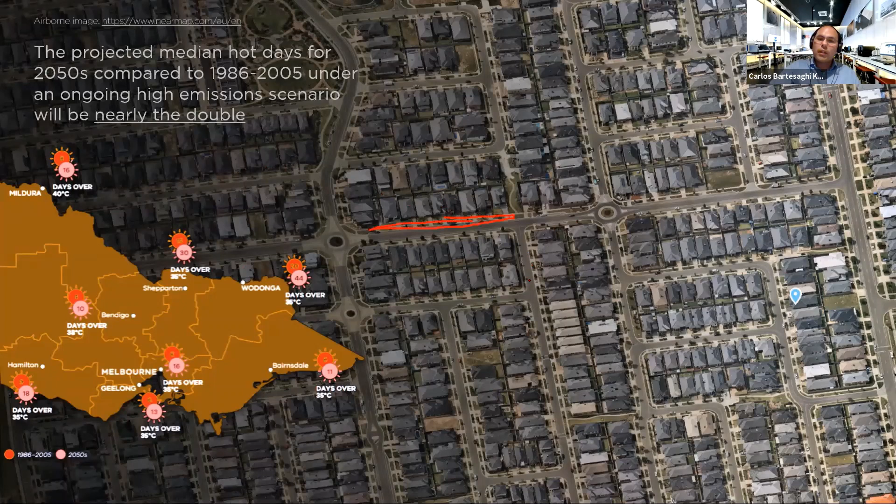So if we continue designing streets like this, with a lot of lack of greenery, no trees, no green open spaces around, a lot of pavement, a lot of asphalt, and quite dark asphaltic tiles or dark colored roofs all over the place, we will have very high surface temperatures and consequently very high air temperatures and very high heat stress on people.

Besides that, we will have a penalty in terms of money for cooling. Building energy consumption is significantly higher in this type of development. Imagine each of these houses, because that's what they offer you. Now, when you purchase one of these houses, they offer you air conditioning, so you will have more days of the year of these houses using air conditioning.

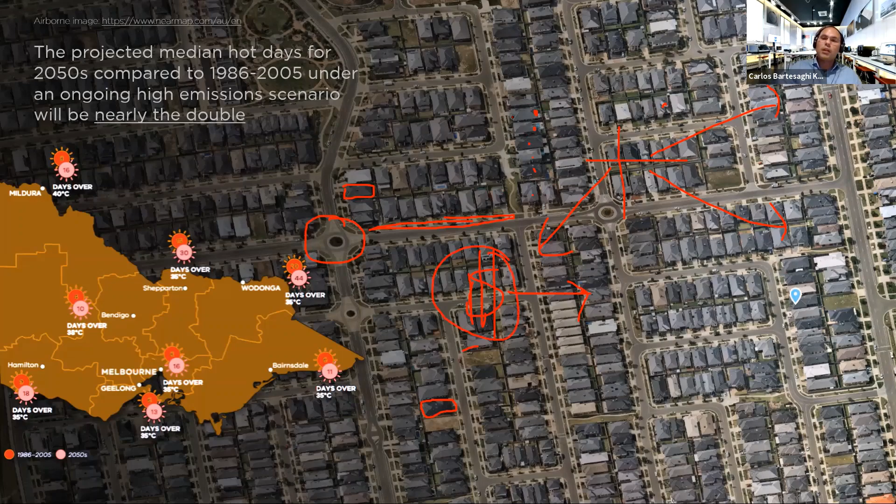Because of that, DELWP wanted to develop... what we needed to do is identify case studies. We want to develop guidelines for developers so they can design better cities and better neighborhoods.

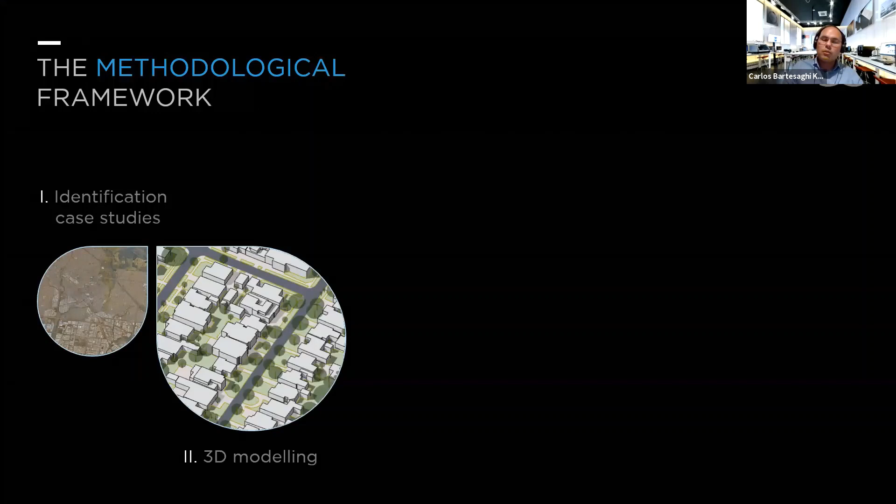We identified different case studies and modeled these in 3D using ArchiCAD. Then we exported that into Grasshopper and Rhino to model voxels, volumetric pixels, to put it in simple words. These were exported from Grasshopper into ENVI-met, where we modeled again CFD simulations or climatic simulations, and with the evidence, we developed a dynamic matrix tool and design guidelines for DELWP. These are the different locations across the Melbourne metropolitan area and Geelong.

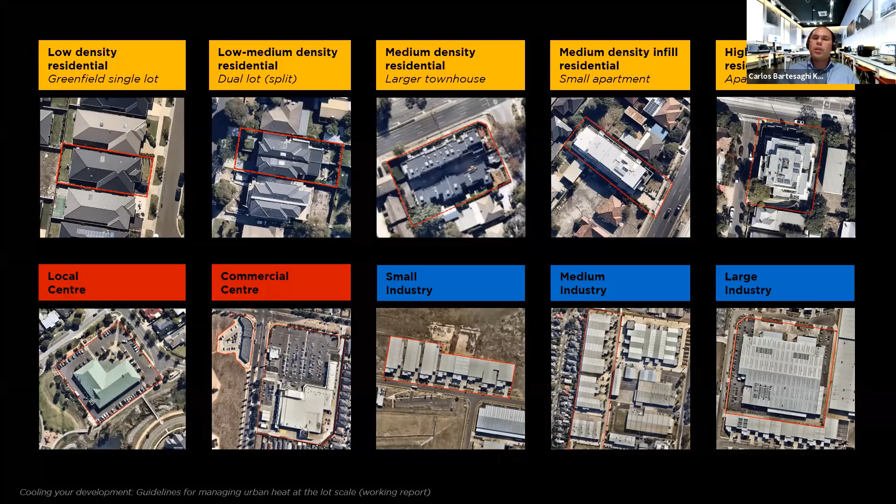It's a huge conurbation, so we identify, guided by DELWP, different types of developments. These developments are basically low density residential, single lot, dual lot split, medium density residential or larger townhouses, small apartments and larger apartments represented as high density. Then we also have commercial buildings and small, medium and large industry.

With this information, once we identified the case study, we modeled all the case studies in ArchiCAD in a three-dimensional model. You can see this is an abstraction, a 3D model of the real case.

And then we identify different scenarios using the literature. There are already guidelines available, and a lot of literature that says which type of combinations are more efficient or effective in this type of development. So guided by this literature, we identify different scenarios for the different developments.

For example, scenario one was just cool materials in roofs and pavements. We also added green roofs, modeled a small canopy cover and large canopy cover, a combination of materials, pavement and greenery, and also green roofs combined with vertical greenery and small trees.

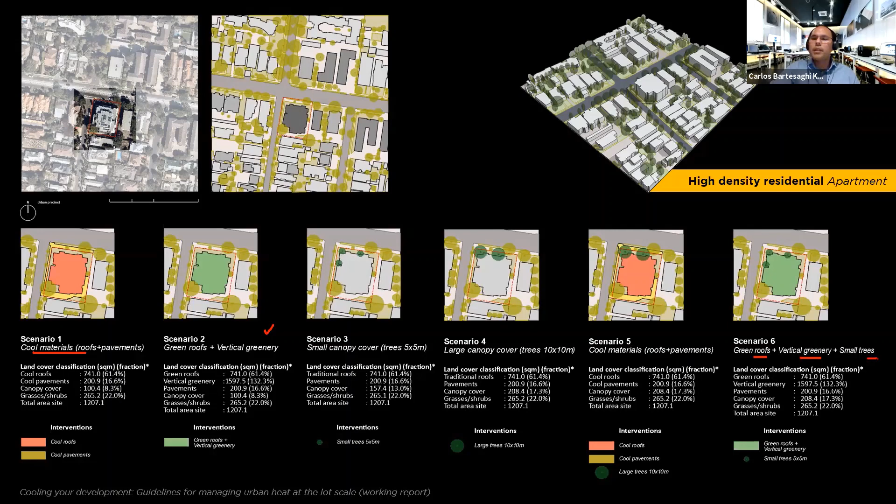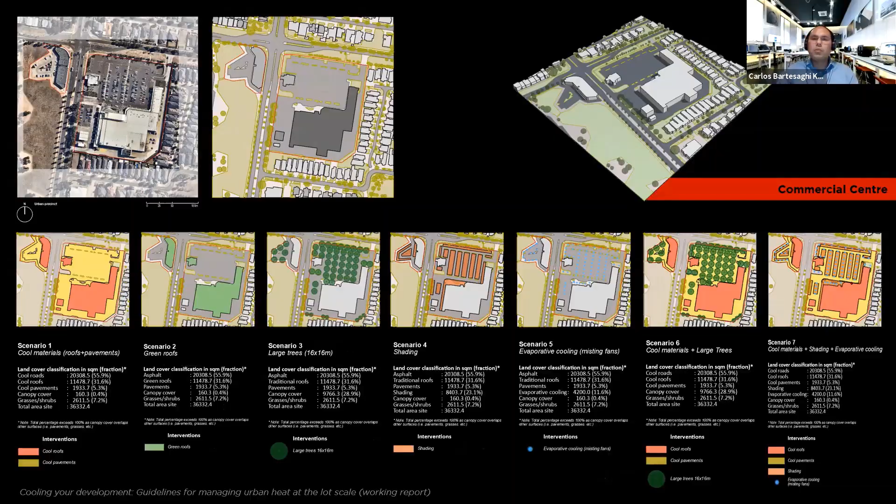So we have a Rhino model here, and then we use Dragonfly, which has a set of tools to export from Rhino directly to ENVI-met. You can visualize all the solutions and simulations in 3D.

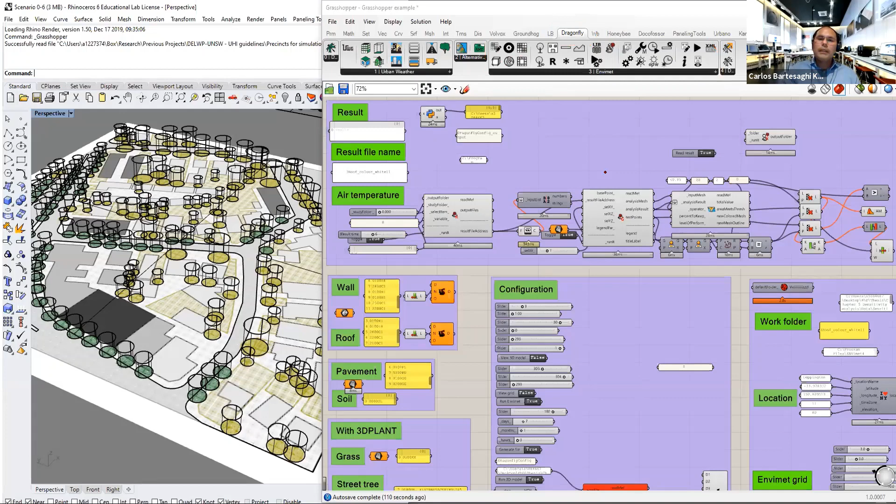We exported those ENVI-met simulations into a table, so we have an idea of which scenarios perform best, or the best combination. For example, for high density residential, cool materials and large trees provided a significant temperature reduction of up to 1.5 degrees and thermal improvement up to 2.3 degrees. Surface temperatures also reduced considerably because of shading and evapotranspiration.

But we identified that green roofs provided significant cooling for the building, but not for the surrounding area, because it's most likely that the wind will spread these cooling effects several meters above the ground, so it doesn't have any effect at pedestrian level.

Finally, with all that information, we developed a matrix, which is a dynamic matrix. What you see here is just the prototype, the initial draft of the tool. Now they have a much more modern one, and they are developing one using a web developer, so it's embedded on a website. It will be ready soon.

In this matrix, you can select the different mitigation strategies and display the simulation results, so you can understand the spread of thermal conditions and temperature reductions, and select which is the best performing one, visualizing it, like in this case with cool roofs or green roofs.

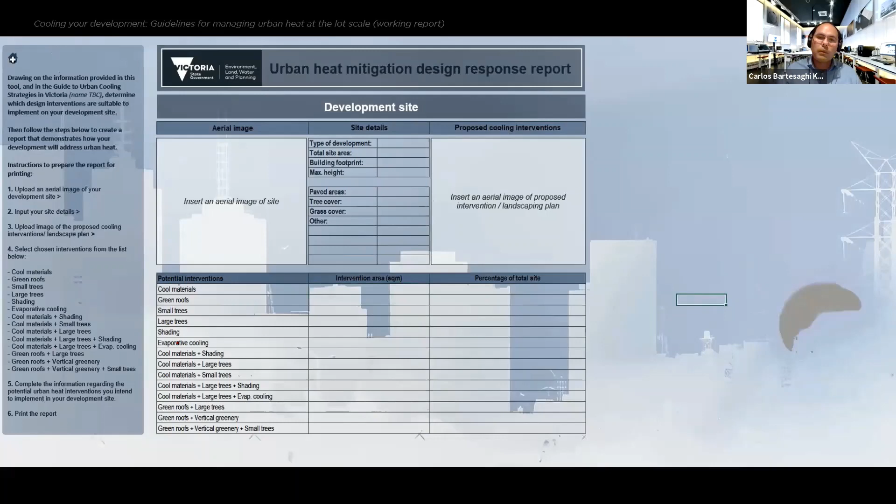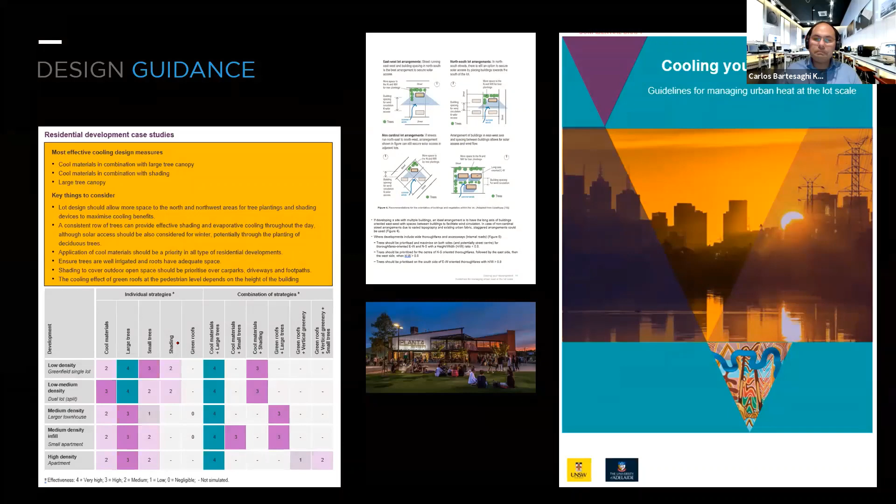With this information, we have enough scientific evidence to provide guidelines to governments and developers. We embedded this tool into a report they can use for reporting the results. We designed different guidelines at lot scale, and identified which combination of strategies were more effective. So I think with that, I'd like to conclude the presentation of today.

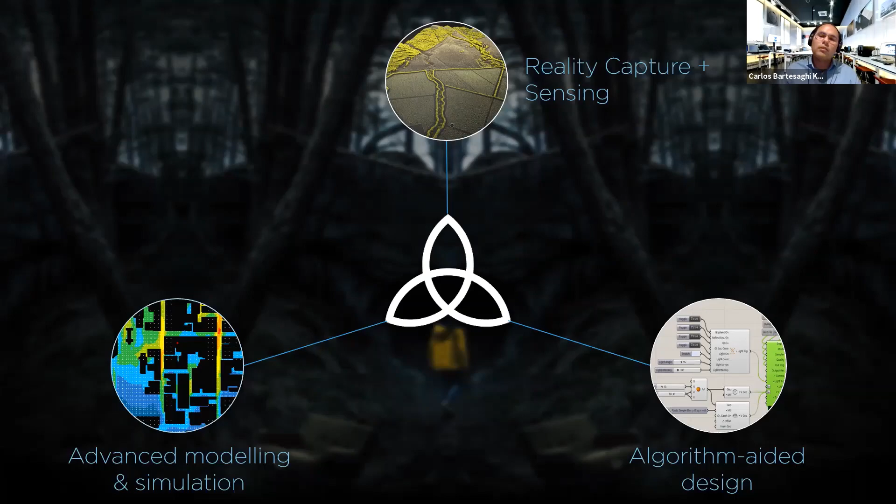As I said, this is the same—I'm borrowing this quote from the TV series: the beginning is the end, but also the end is the beginning. So this is not the end of this talk, but in fact it can be the beginning of a large discussion, because we have the opportunity to combine quite innovative methods and technologies, not only in landscape research, but also in landscape architecture teaching. This is what I'm trying to do at the University of Adelaide, combining reality capture and sensing, algorithm-aided design, and advanced simulation in all the courses we are delivering at AILA. Well, many thanks for your attention.